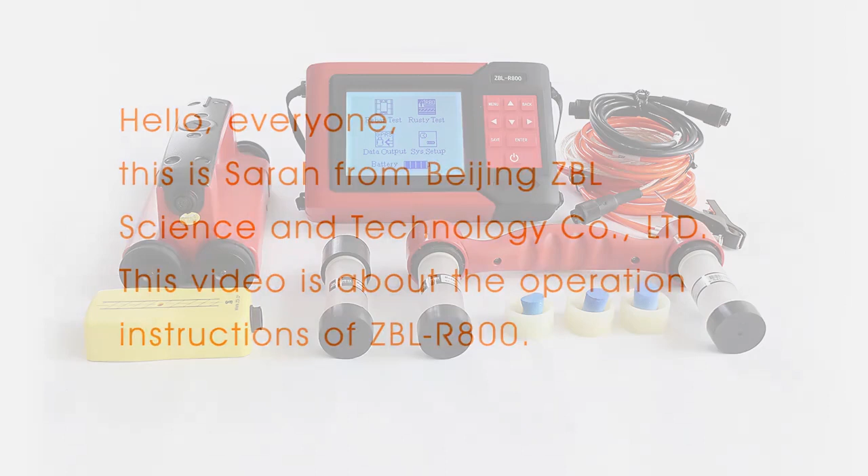This video is about the operation instruction of ZBL-R800. This multifunctional rebar detector is integrated and portable, which can estimate rebar diameter, test rebar cover meter, detect rebar location and distribution, and measure rebar's current condition.

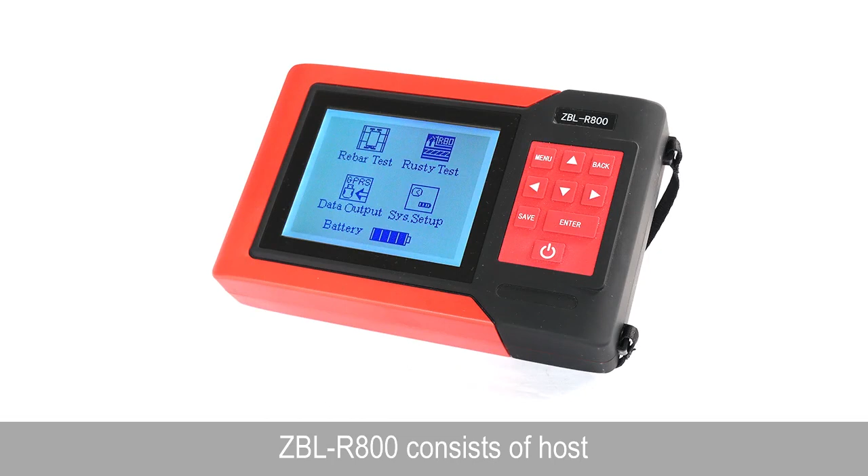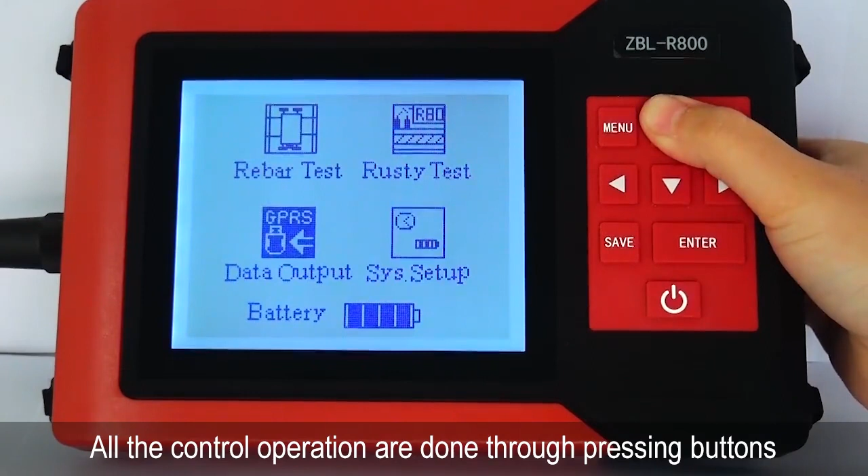Introduction of ZBL-R800. R800 consists of a host, rebar sensors, rebar signal wire, copper sulfate electrode, double electrode handle, rust signal wire, U-disc, charger, and so on. All the control operations are done through pressing buttons in the keyboard panel.

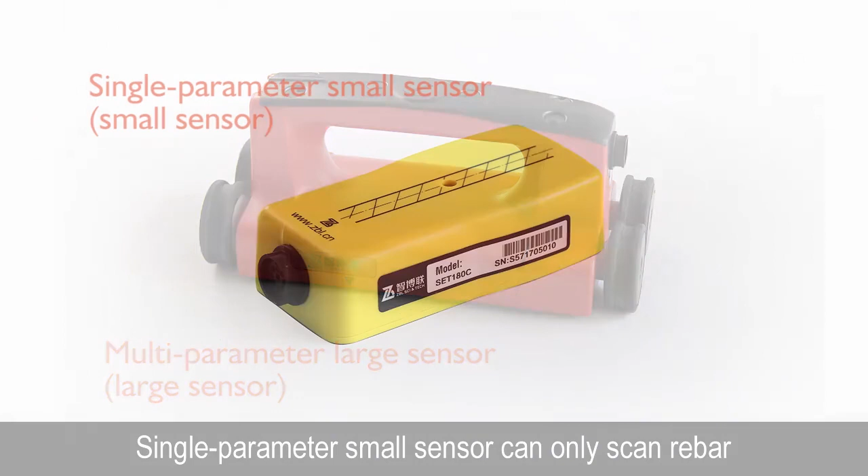On the left side of the host are round charging port, USB port, rebar sensor port, and rust electrode port. R800 detector has two sensors, large sensor and small sensor. Multi-parameter large sensor can scan rebar and record displacement of sensor in real time accurately. Single parameter small sensor can only scan rebar and it can't record the displacement of sensor.

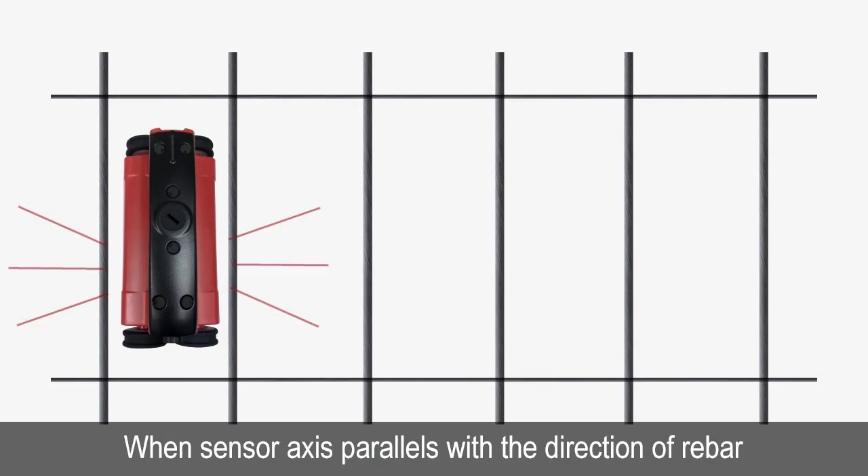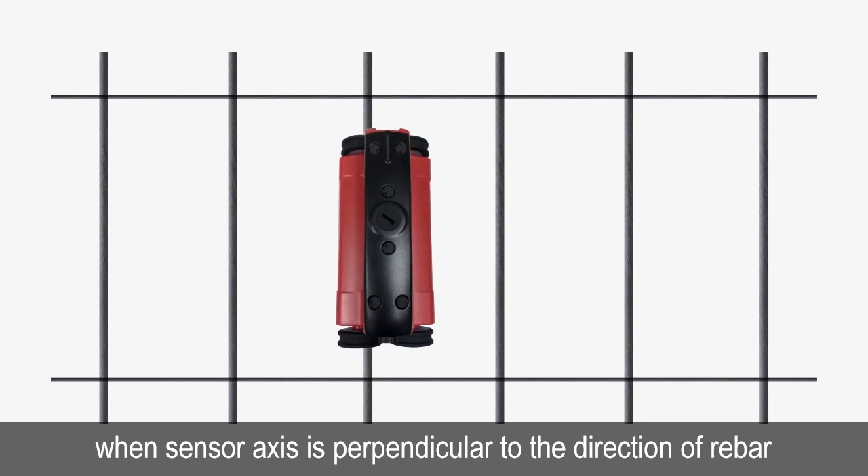When the sensor axis parallels with the direction of a rebar, it is the most sensitive. Conversely, when the sensor axis is perpendicular to the direction of a rebar, the signal is the weakest. Therefore, while measuring, sensor axis should be parallel with the direction of a rebar.

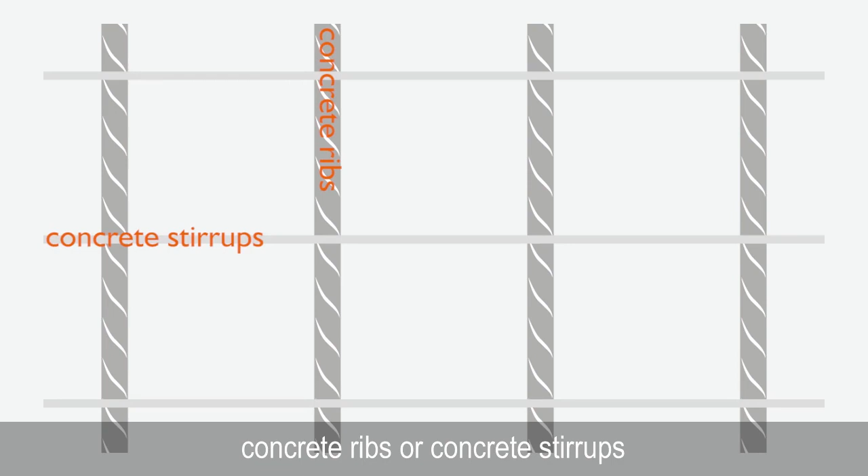Most importantly, when you detect cover meters, you should know clearly what rebar's cover meter you want to test, concrete ribs or concrete stirrups. When you test the rebar's cover meters, you should avoid the influence of stirrups, and likewise, you should avoid the influence of rebars if you need to test the cover meters of stirrups.

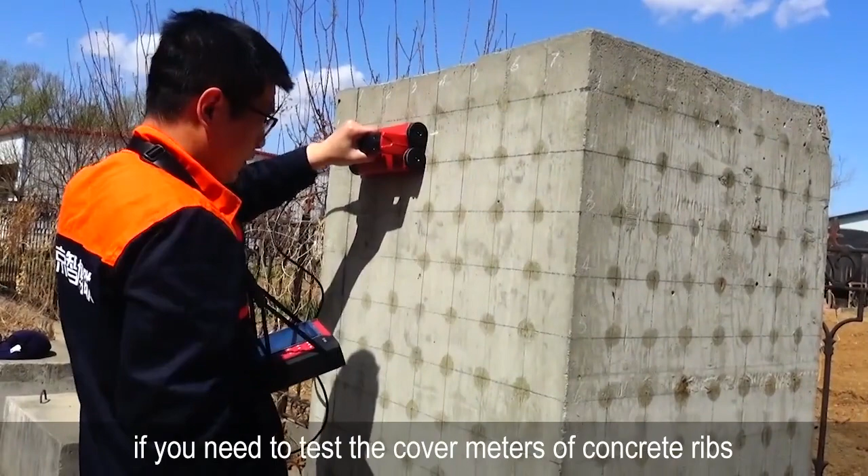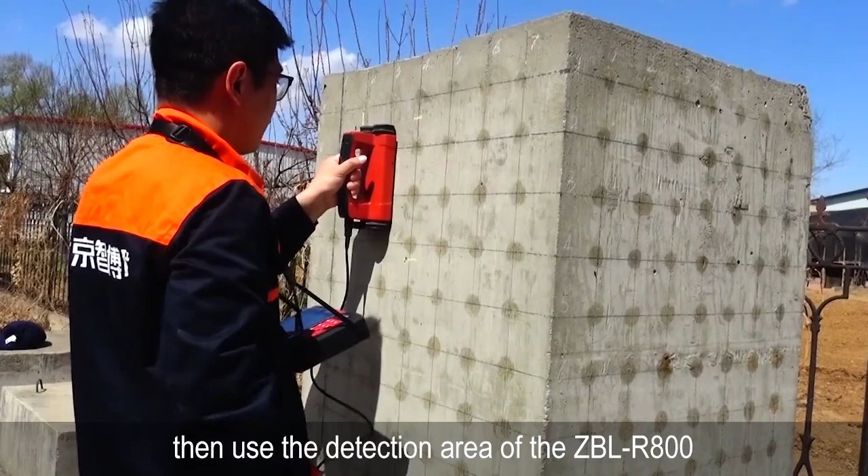For example, if you need to test the cover meter of concrete rebars, you should locate concrete stirrups and mark their position first. Then use the detection area of ZBL-R800 to scan the space between two stirrups to test the cover meter of concrete rebars.

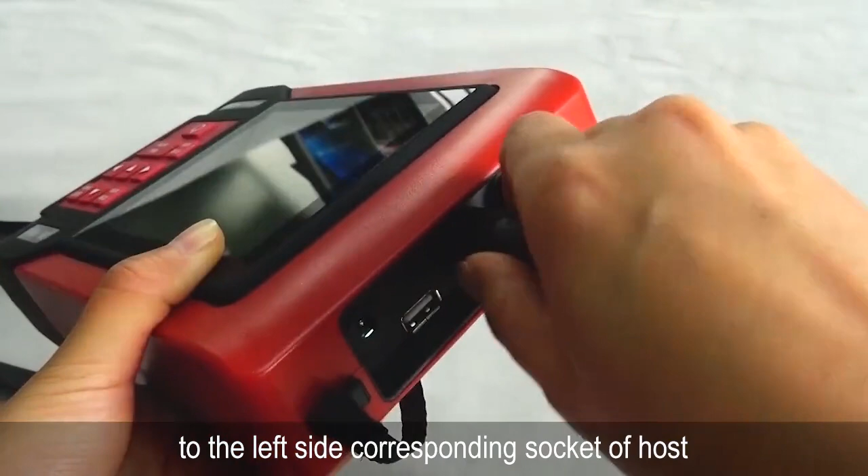When you test rebar corrosion on the double pole method, you should install these two copper sulfate electrodes filled with copper sulfate solution on double electrode handle. Insert one end of the black rebar signal wire to the left side corresponding socket of host, rotating clockwise and locking, and then insert the other end into sensor socket and lock in the same way.

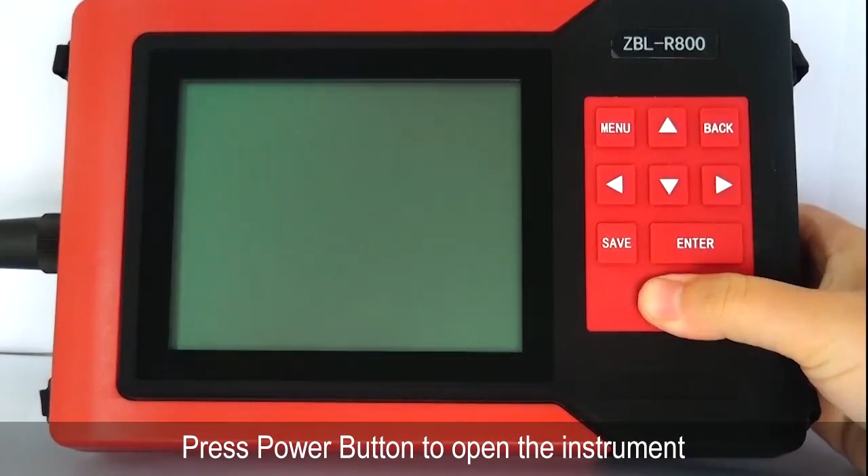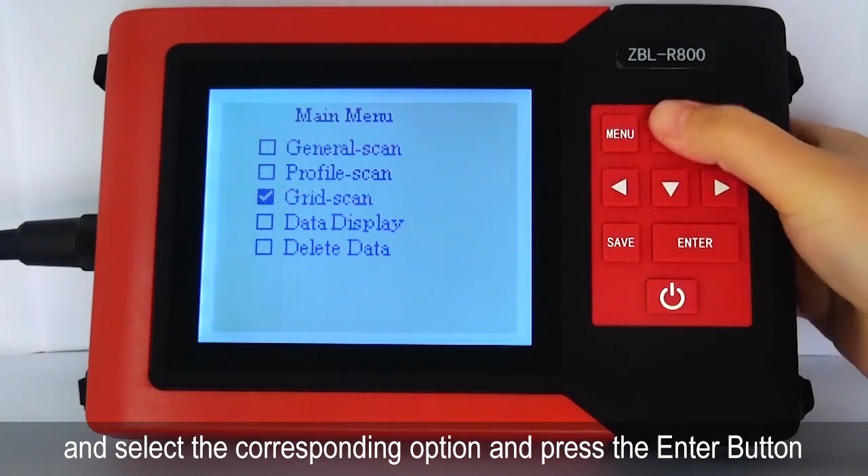Press power button to open the instrument, press right button to turn on screen backlight, press enter button to enter rebar tester interface. Rebar tester has three test modes: general scan, profile scan, and grid scan. Up button and down button can move the option box and select the corresponding option, and press the enter button to go to the corresponding sub-menu.

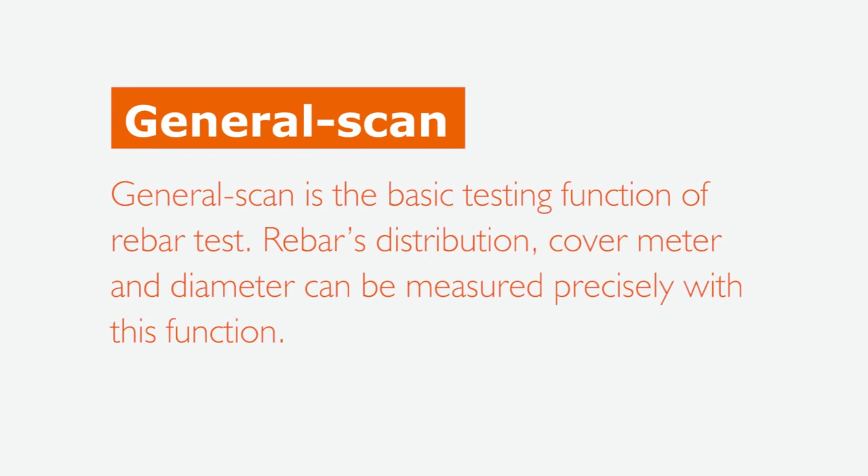General scan. General scan is the basic testing function of rebar test. Rebar's distribution, cover meter, and diameter can be measured precisely with this function. Press the enter button to general scan interface. Press enter button to set the object number.

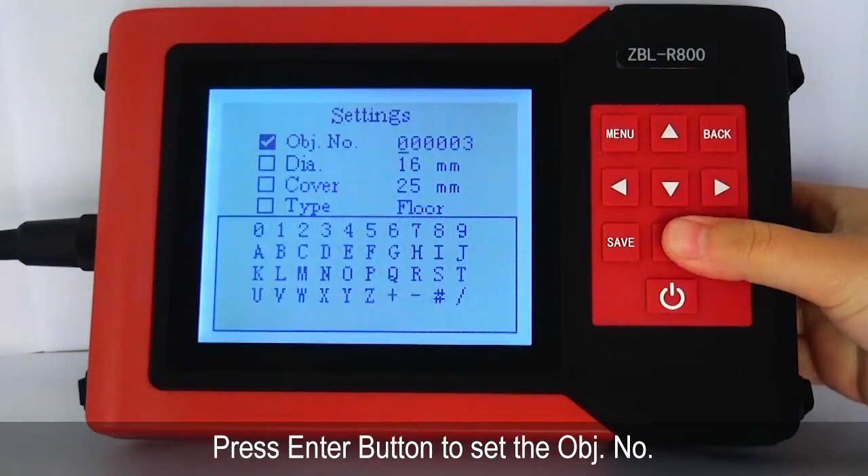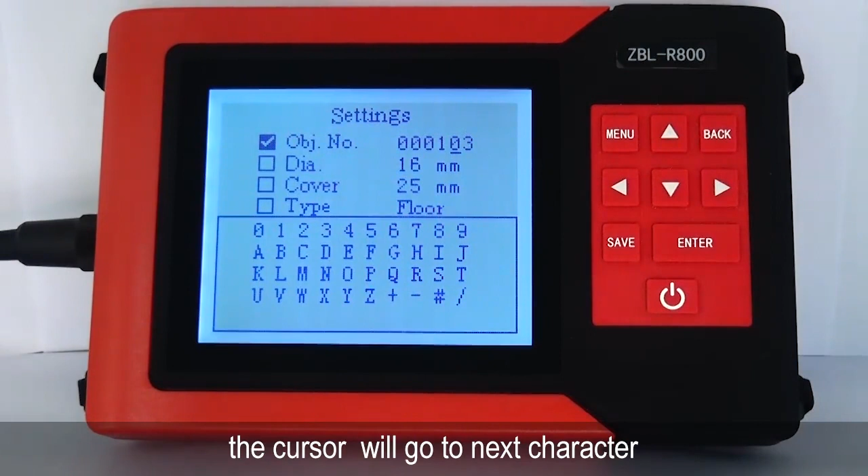Move the cursor to the character to be modified through pressing right and left button. Press enter button, the cursor will move to the keyboard. Find the character you want through pressing the direction buttons, and then press enter button. The cursor will go to next character. Press the save button after setting all characters.

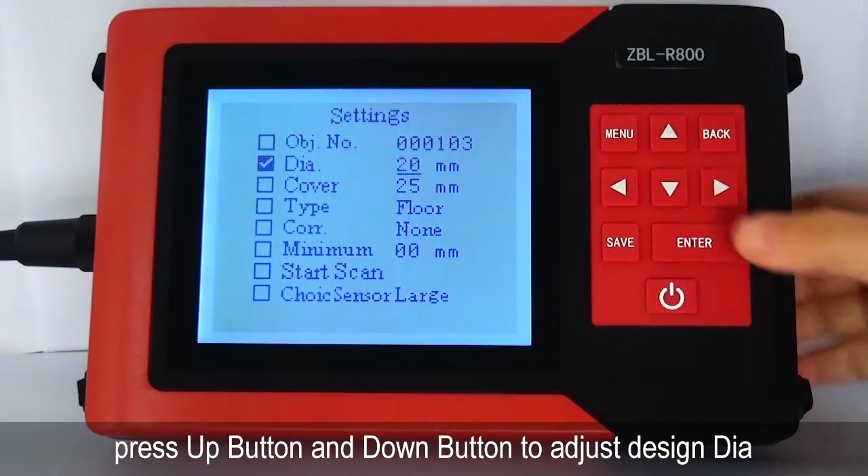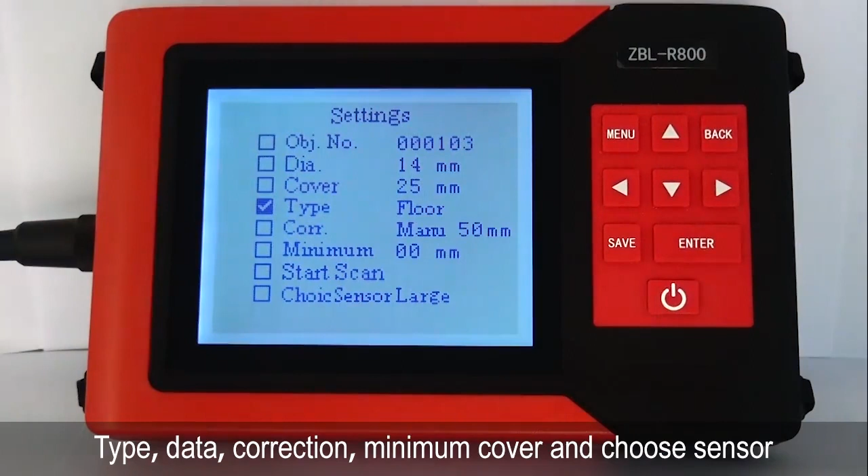Choose diameter through pressing down button, press enter button, press up button and down button to adjust the design diameter, and press enter button after completing adjustment. Revise design cover meter, diameter, type, data correction, minimum cover, and choose sensor based on real project information.

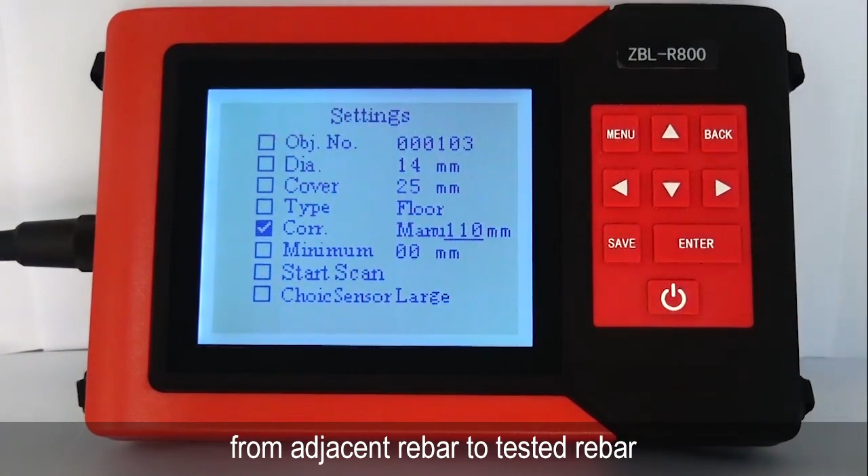Data correction. In order to lower the effects on the measurement of cover meter of tested rebar by adjacent abreast ones, it's better to set center distance from adjacent rebar to tested rebar, and then the detector can modify test result automatically and improve test accuracy.

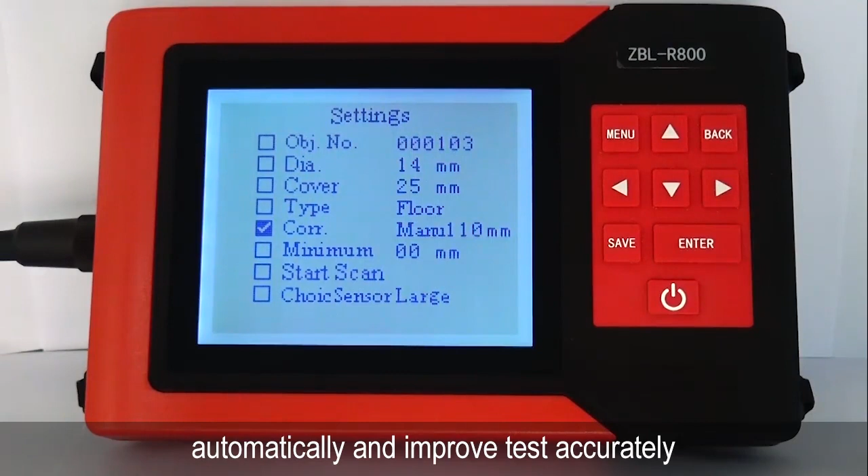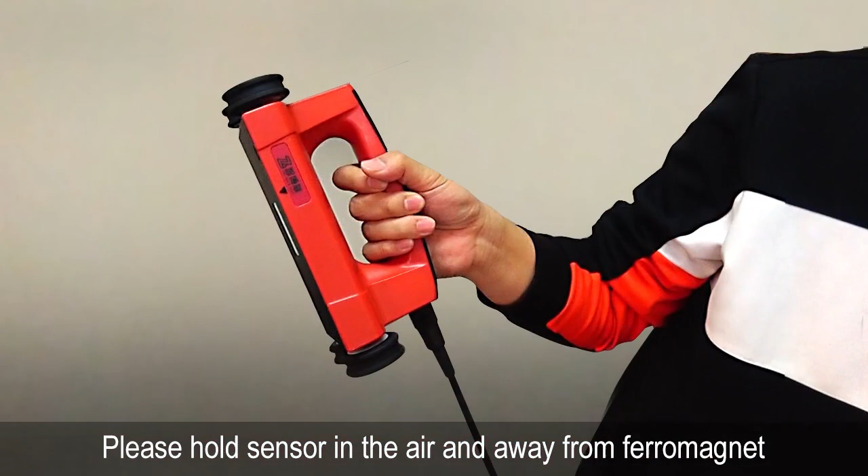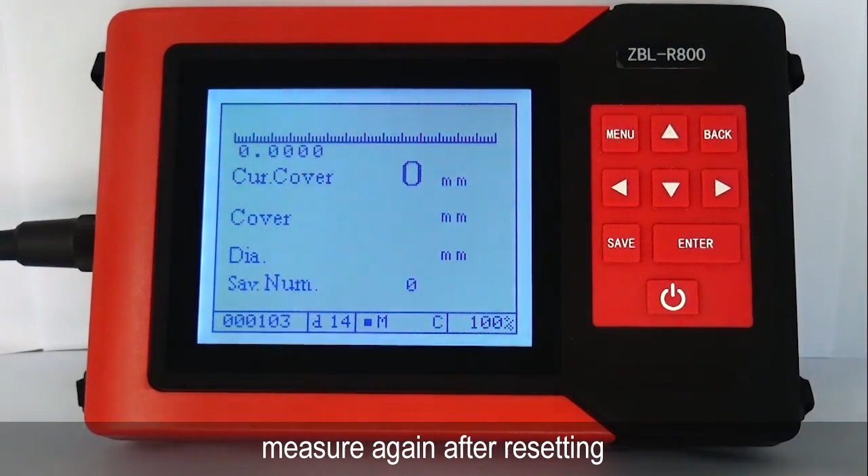After setting all parameters, choose Start Scan, press Enter button to go to Test Interface. Please hold the sensor in the air away from ferromagnet. After pressing Enter button, the instrument will reset automatically and the present thickness will show in blank. During detection process, a reset operation should be done about every 10 minutes. When in doubt about the measurement data, measure again after resetting.

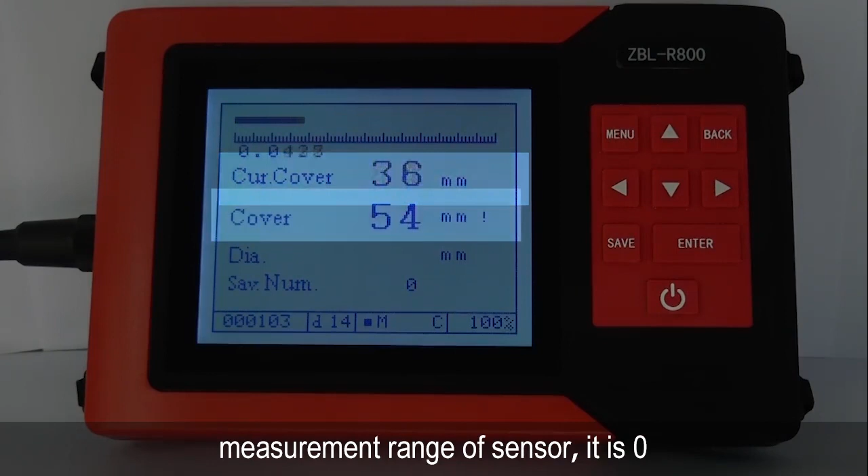Current cover. The current cover meter is the equivalent distance between sensor and rebar. The larger the equivalent value is, the further it is. When the equivalent value exceeds the measurement range of sensor, it is 0. Cover. Display of measurement value of thickness of concrete cover automatically.

If users use the data correction, it shows the corrected value. Diameter: display the diameter of tested rebar. Press the up button for the measurement of diameter when the sensor is just above the rebar, and the rebar diameter value will appear a moment later.

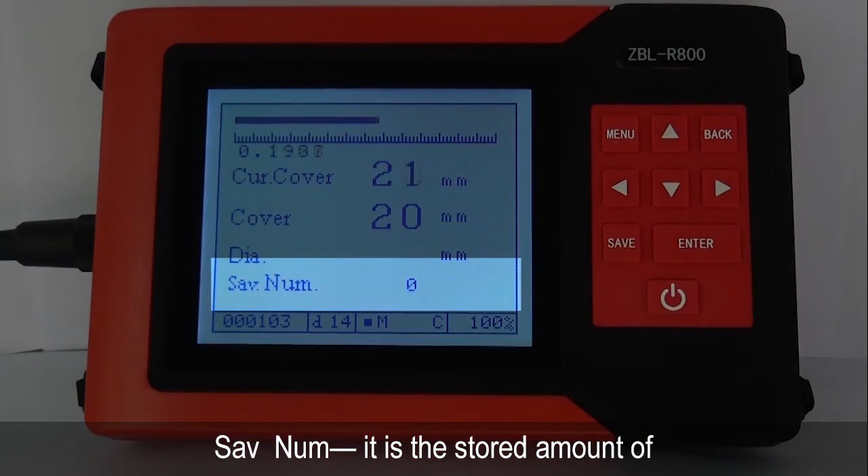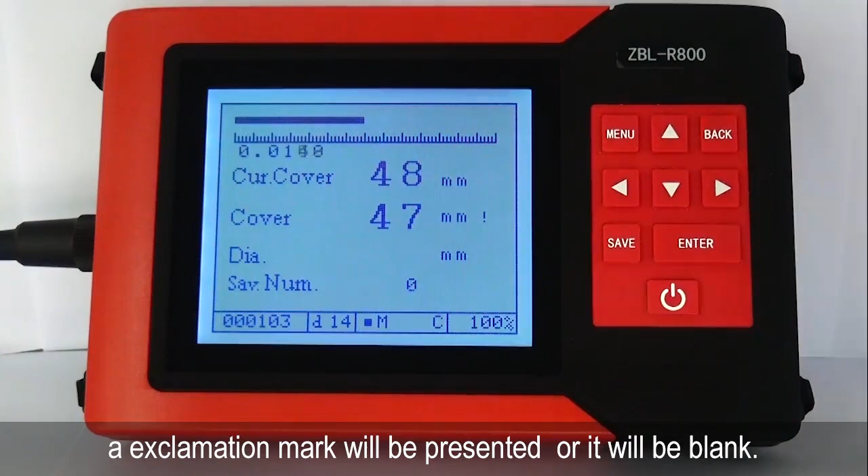Save number: it is the stored amount of cover meter for the present object. When the tested cover meter exceeds the range of specification, an exclamation mark will be presented, or it will be blank. The bottom line shows the object number, design diameter, status information, and qualification rate.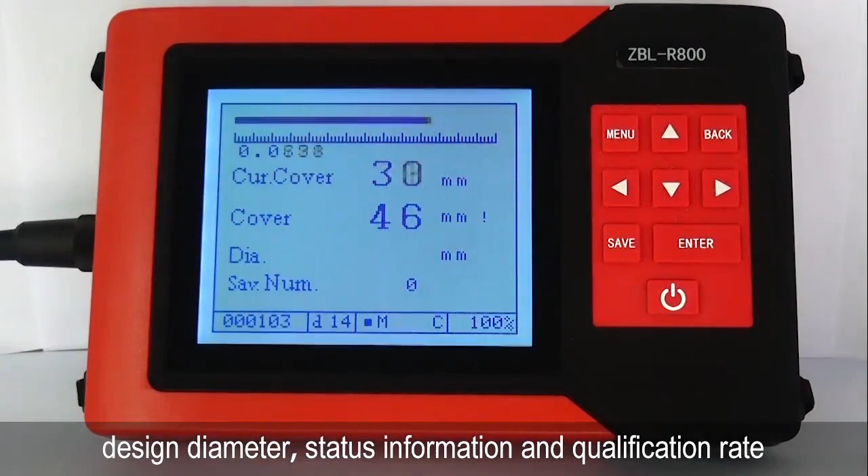A solid square in the information status bar represents small range, and an open square represents large range. Large range is suitable for large cover meter situations. The default range is small range, and you can change range by pressing the right button. M represents manual storage, while A represents automatic storage. You can adjust by pressing the left button.

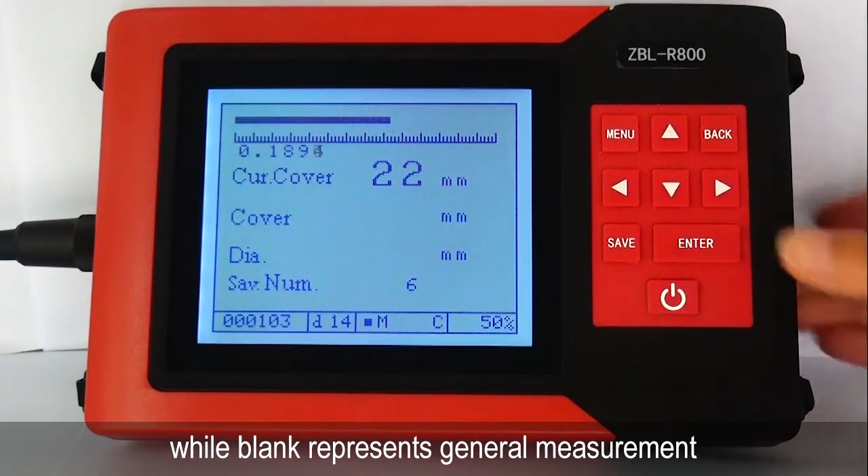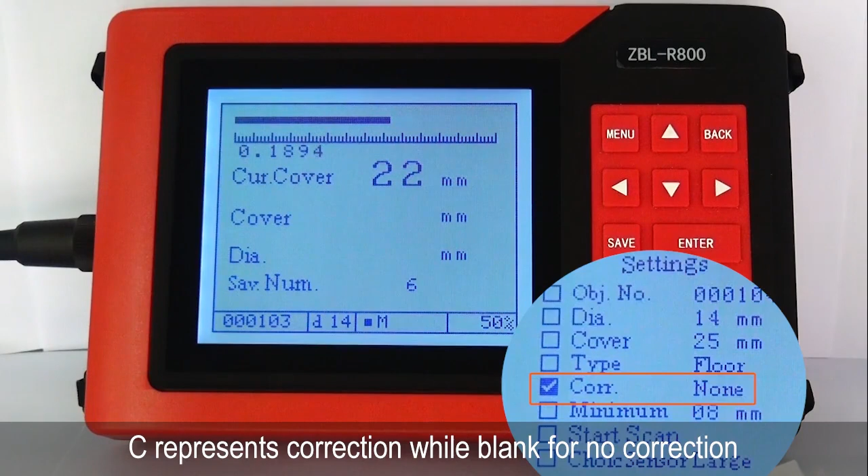This icon represents denser rebar measurement, while blank represents general measurement. The default one is general measurement, and you can switch by pressing the down button. C represents correction, while blank is for no correction.

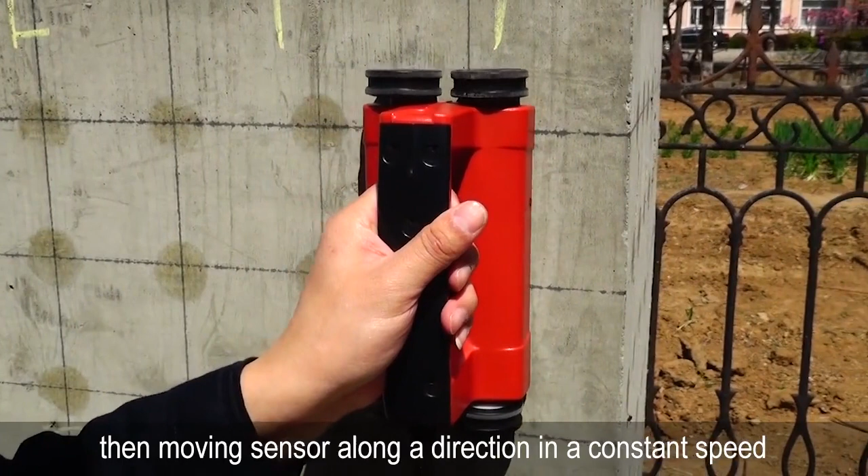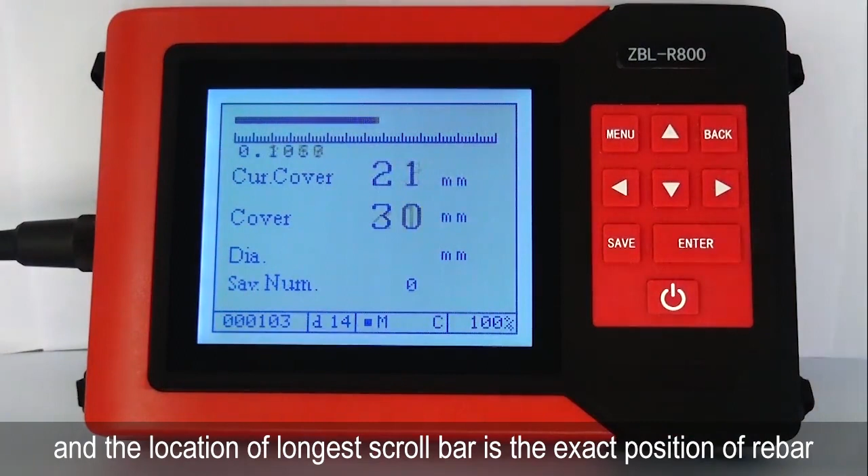Place the sensor on the surface of the tested concrete, parallel with the tested rebar, then move the sensor along a direction at a constant speed. When the sensor goes towards the rebar, the signal value will become larger and larger, and the biggest signal value identifies the location of a rebar. When the sensor approaches the rebar, the scroll bar will lengthen gradually, and the location of the longest scroll bar is the exact position of the rebar. When the sensor goes over the rebar, the buzzer will alarm.

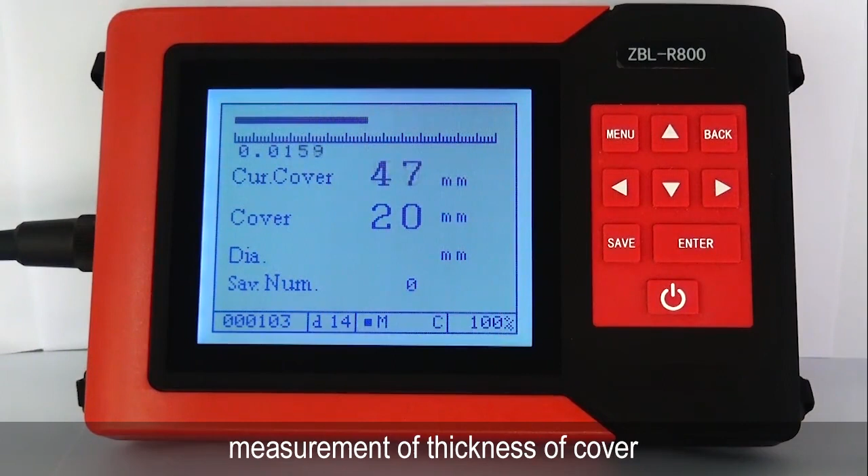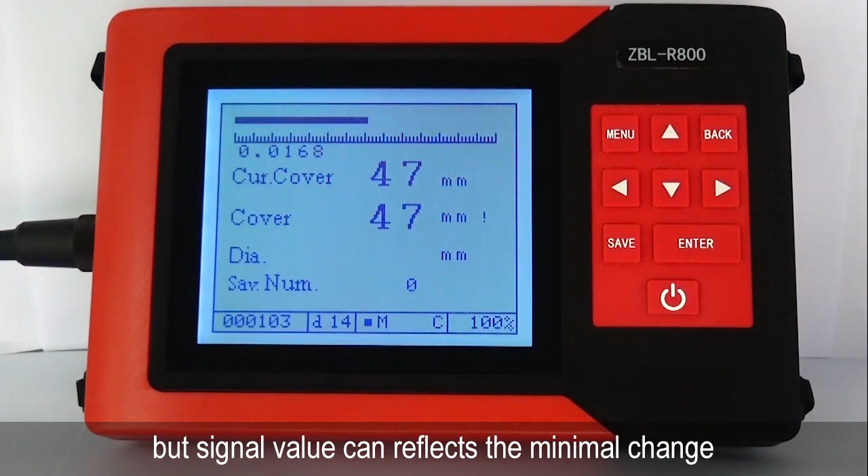Signal value is the fundamental basis of measurement of the thickness of cover. When the change of cover meter is within 1 mm, the current cover value will not change, but the signal value can reflect the minimal change. Therefore, according to it, you can locate the exact position of rebar more accurately. When the sensor approaches the rebar, the current cover value will gradually become smaller, or else the current cover value becomes larger. The location of minimum cover is the exact location of the rebar.

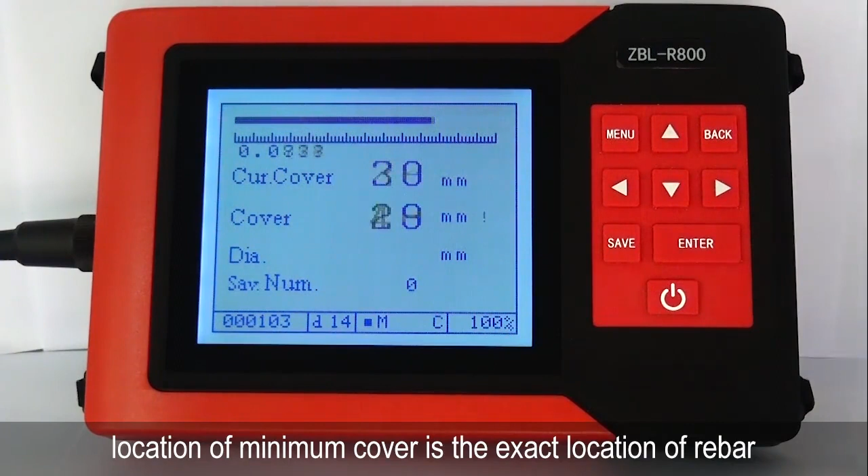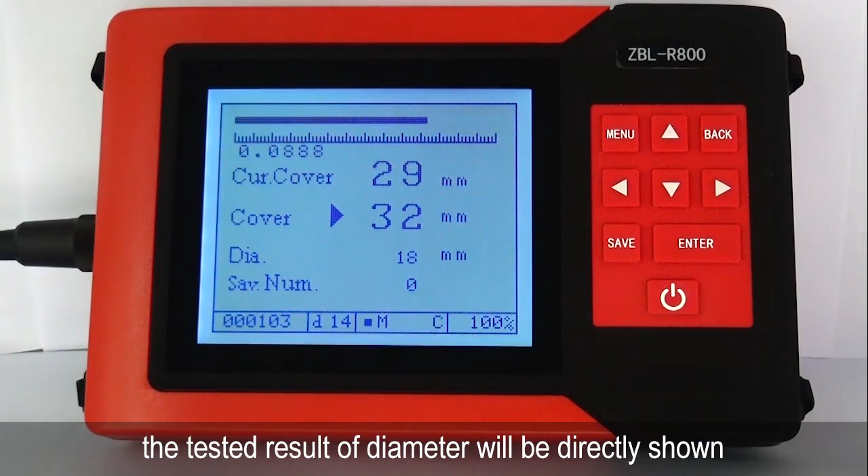Placing the sensor above the tested rebar and parallel with it, press the up button. After about 2 seconds, the tested result of diameter will be directly shown in the position of diameter. Under the mode of manual storage, if you press the Save button, it will store diameter and thickness of cover, and the storage amount increases by 1. Under the mode of automatic storage, it will store the diameter value and thickness of cover automatically.

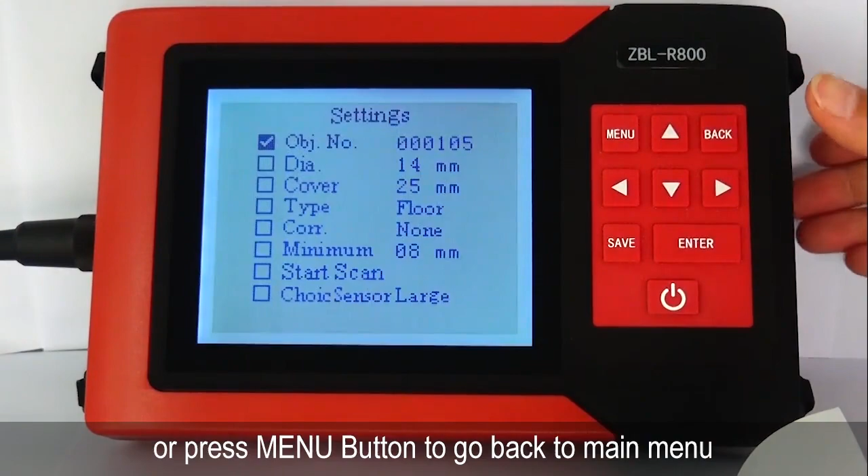After the test is completed, press the Back button to go back to the parameter setting interface, or press the Menu button to go back to the main menu.

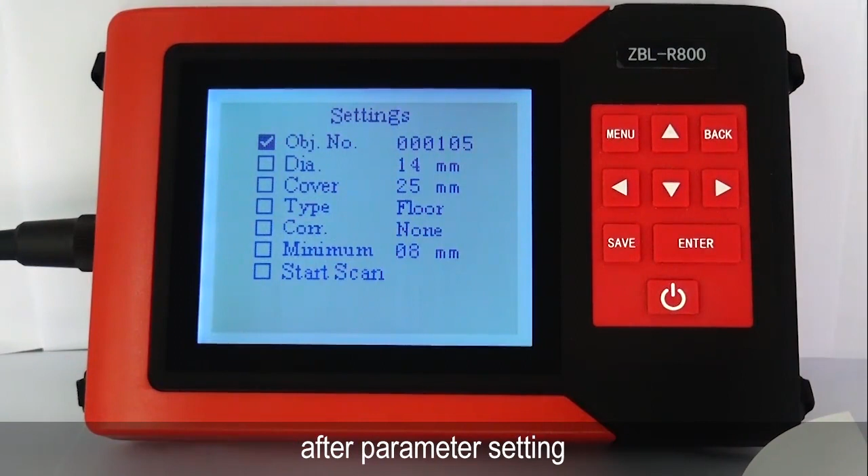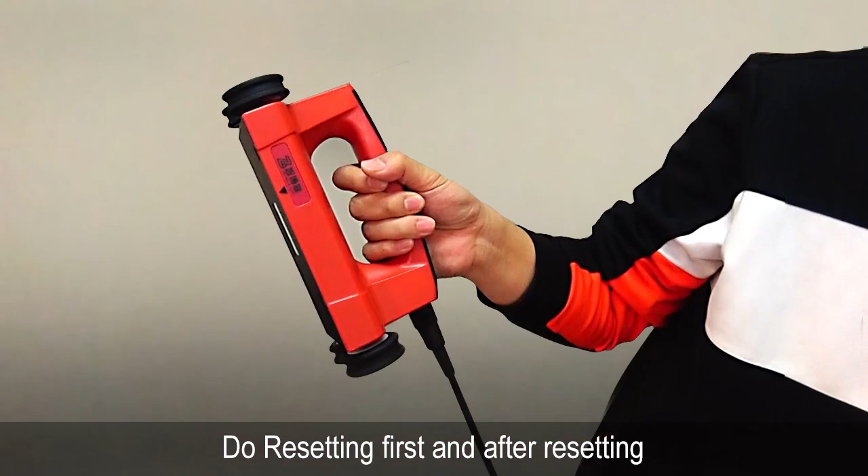Profile scan. Profile scan is a test displaying the location of tested rebar and thickness of cover with a sectional distribution map. Choose Profile Scan and enter the Parameters Setting Interface. Under this test mode, it is a must to choose the Large Sensor to scan. After parameter setting, please select Start Scan and press the Enter button to store parameters and enter into the Test Interface. Do resetting first, and after resetting, press the Save button to enter into the Test Interface.

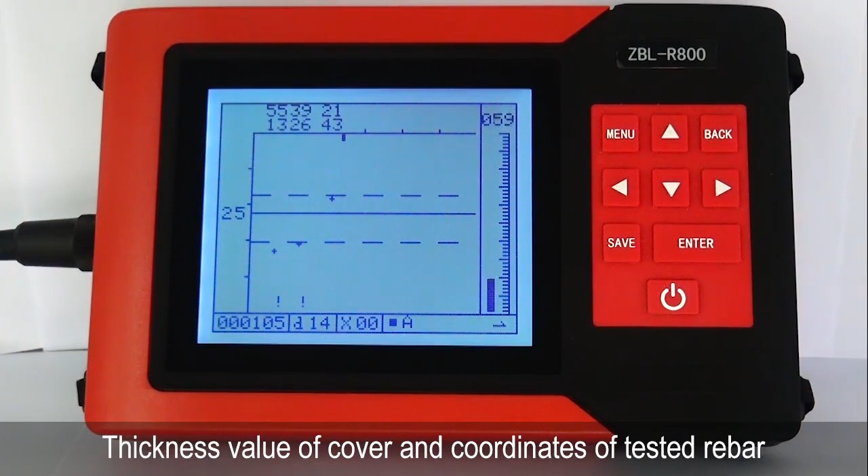A square cursor will occur in the top left corner, indicating the location of the sensor. While testing, move the sensor at a constant speed. When the sensor goes over a bar, the buzzer will alarm. The tested rebar will be displayed in a corresponding coordinate, indicated by a black cross. The thickness value of cover and the coordinates of the tested rebar will be displayed on the upper side of the rebar, and the tested result will be stored simultaneously.

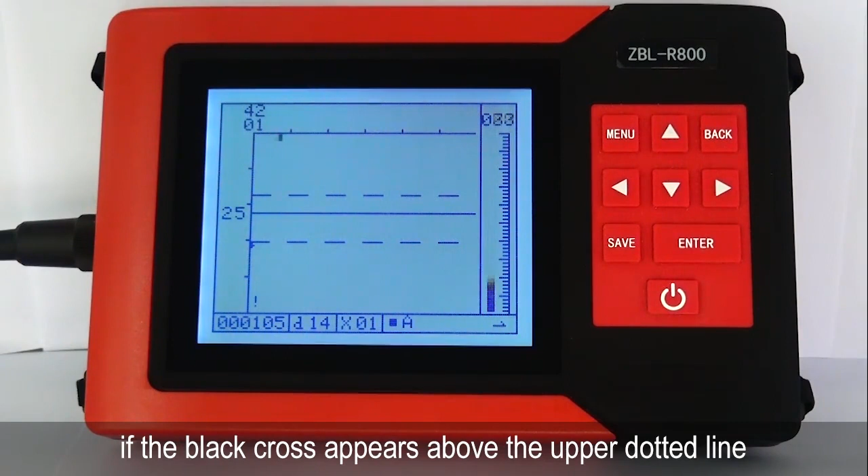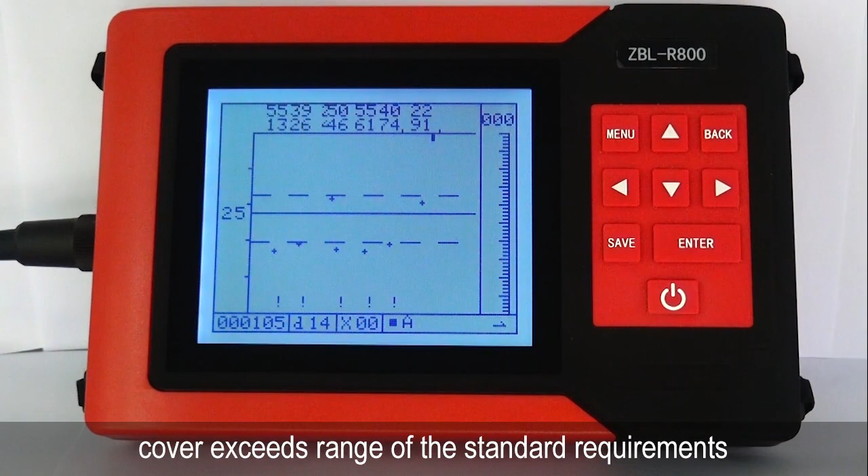The horizontal solid line in the central position is the design thickness value. The upper and lower dotted lines are the minimum and maximum thickness of cover. If the black cross appears under the lower dotted line, it means the rebar's cover is rather thick, and if the black cross appears above the upper dotted line, it means the rebar's cover is pretty thin. During the test process, when the tested thickness of cover exceeds the range of the standard requirements based on design thickness, an exclamation mark symbol will occur, or it will be blank.

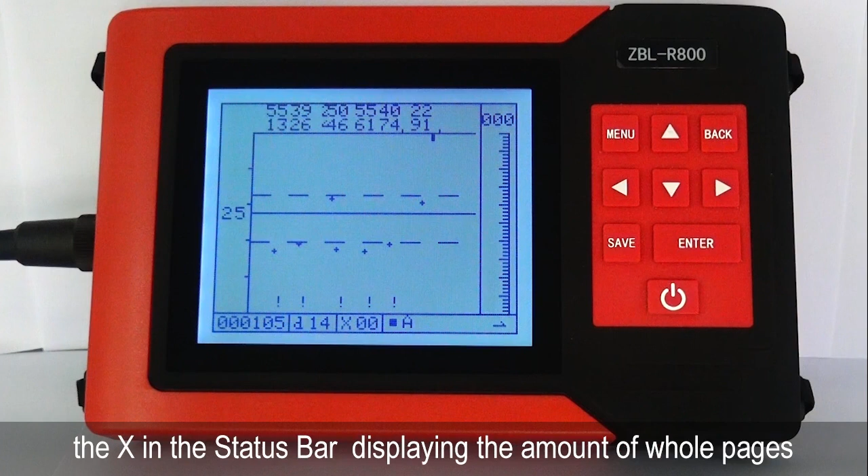When the moving distance is more than 1.2 meters and goes over the range of each screen, it will turn pages automatically. The X in the status bar displaying the amount of whole pages will increase by 1.

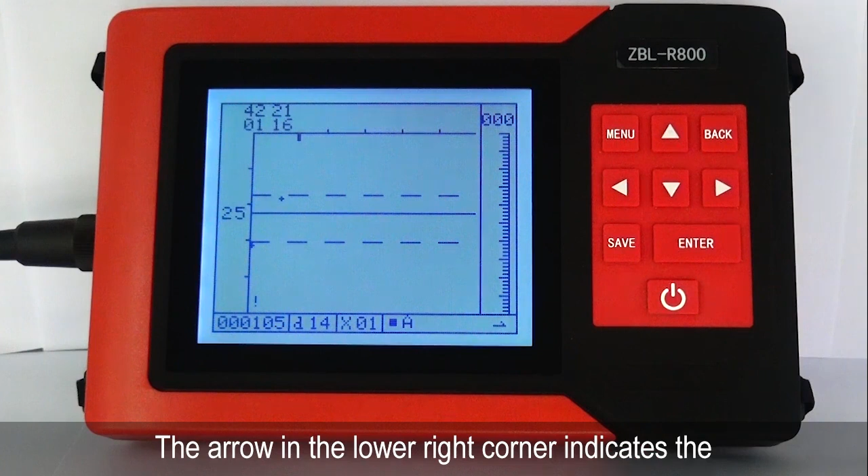The arrow in the lower right corner indicates the direction the sensor is moving. After the test is completed, press Save button, press Back button to store testing data and go back to parameter setting interface, or press Menu button to go back to Main menu.

Grid Scan. Grid Scan mainly displays the distribution of grid distributed rebar through grid diagram and displays the location of rebar and the thickness of cover at the same time. Enter Parameter Settings interface. Diameter X, the diameter of awaiting measuring rebar in X direction. Cover X, the thickness of cover of awaiting measuring rebar in X direction.

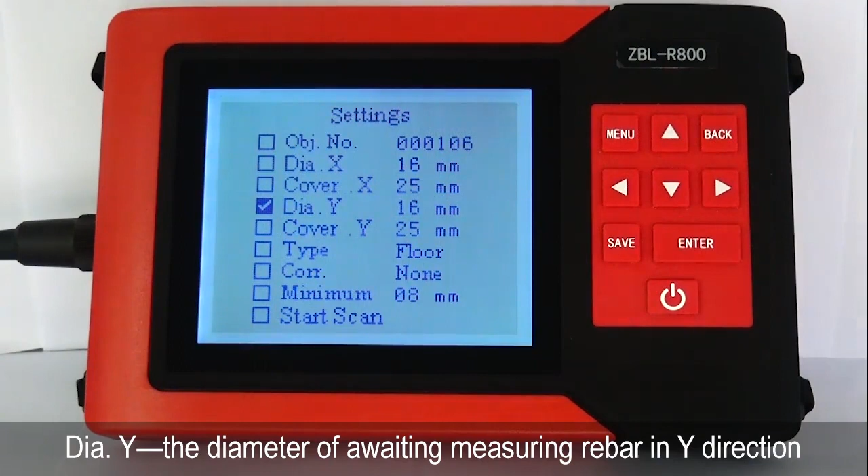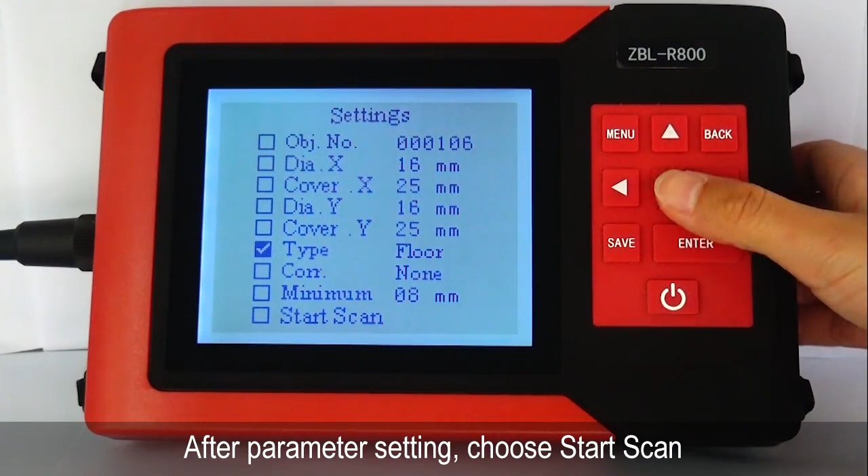Diameter Y, the diameter of awaiting measuring rebar in Y direction. Cover Y, the thickness of cover of awaiting measuring rebar in Y direction. After parameter setting, choose Start Scan and press Enter button to go to Test interface. Do resetting first. After resetting, press the Save button.

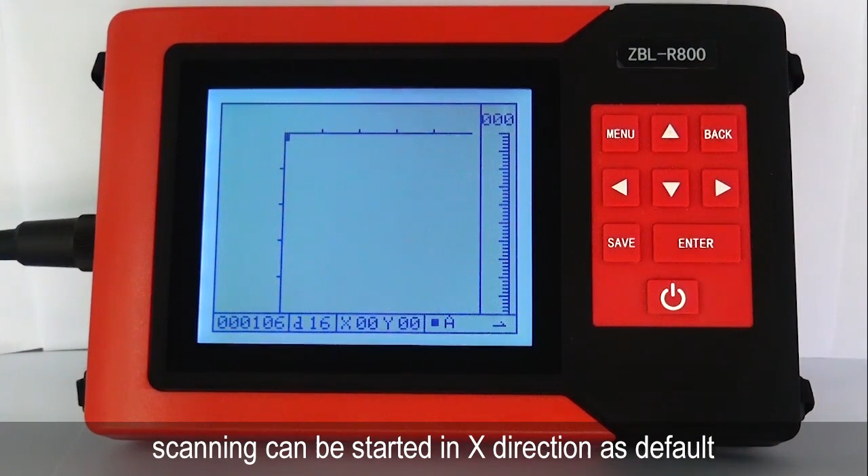A square cursor occurs in the upper left corner, showing the present displacement of a sensor. Scanning can be started in X direction as default. Move the sensor at a constant speed. When the sensor goes over rebar, the buzzer will alarm. The tested rebar will be displayed in coordinate.

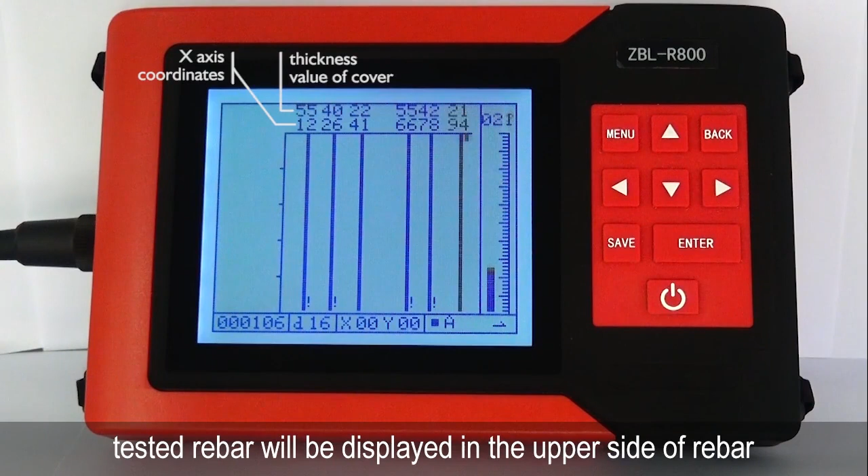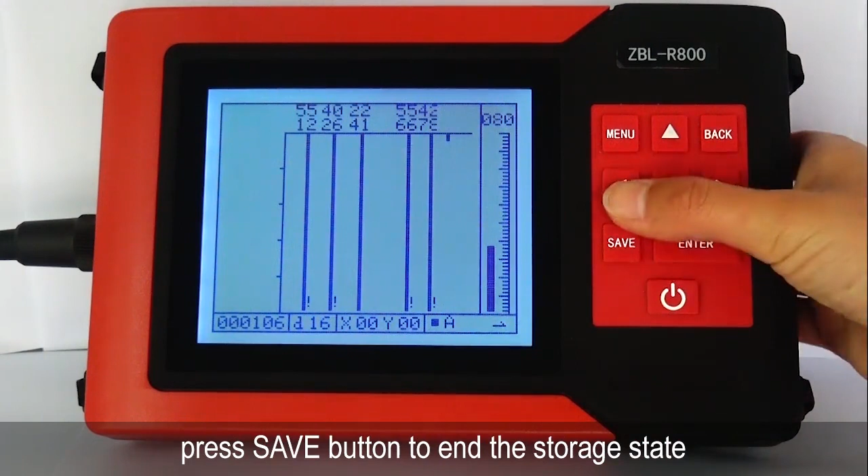Thickness value of cover and X-axis coordinates of tested rebar will be displayed on the upper side of rebar, and the tested result will be stored simultaneously. When X direction test is completed, press the Save button to end the storage state. Press Up button to shift to another direction.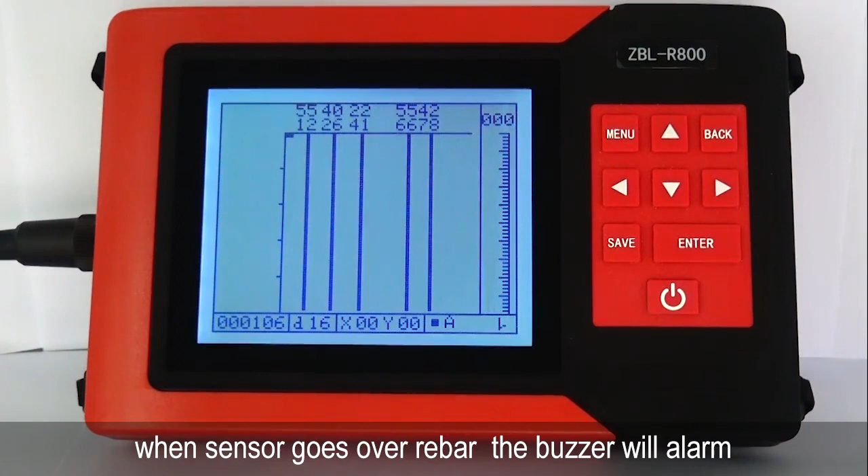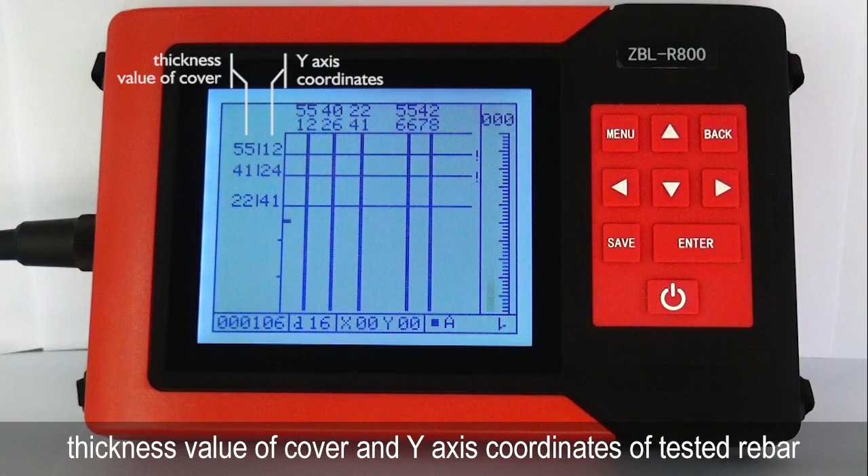The default diameter and direction marker in Y direction will be shown in status bar. Press the Save button for scanning, moving the sensor constantly. When the sensor goes over rebar, the buzzer will alarm. The tested rebar will be displayed in coordinate, and the thickness value of cover and the Y-axis coordinates of tested rebar will be displayed on the left side of rebar.

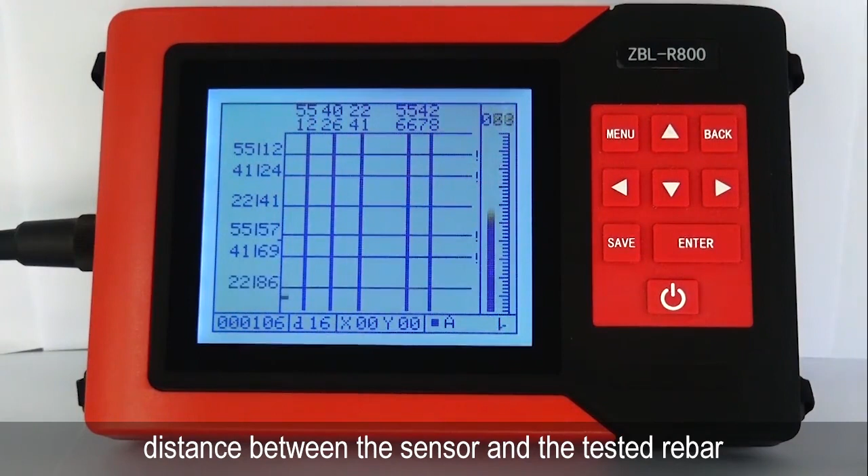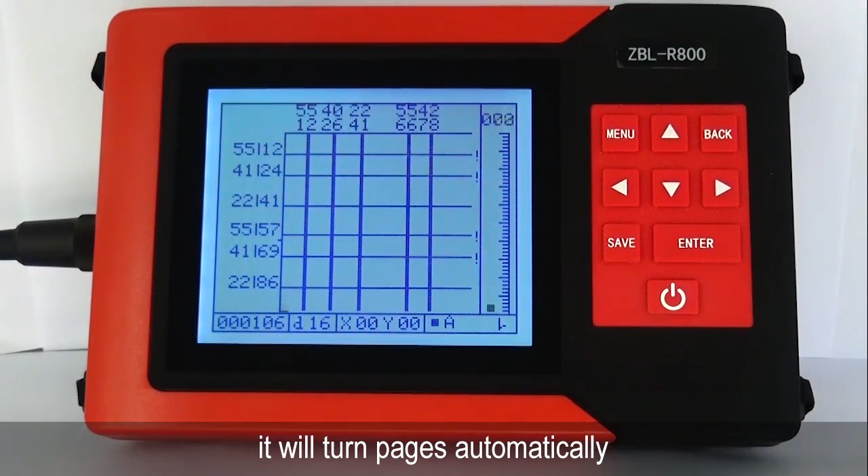When the scanning distance goes over the range of each screen, it will turn pages automatically. The increase by 1 in X and Y direction shows a page turned. After completing test, press the Save button and exit test interface.

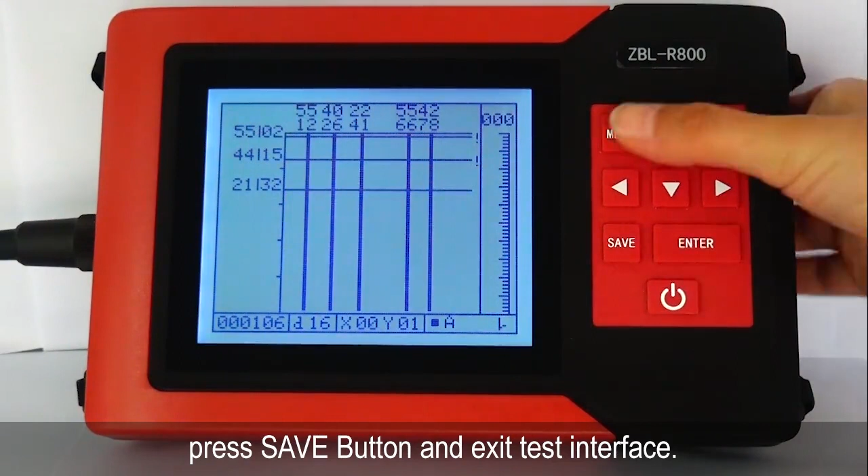After testing, you can check the data or image through entering Data Display. You can delete data through choosing Delete Data. But make sure the data to be deleted have been transferred to your computer, as this operation is irreversible.

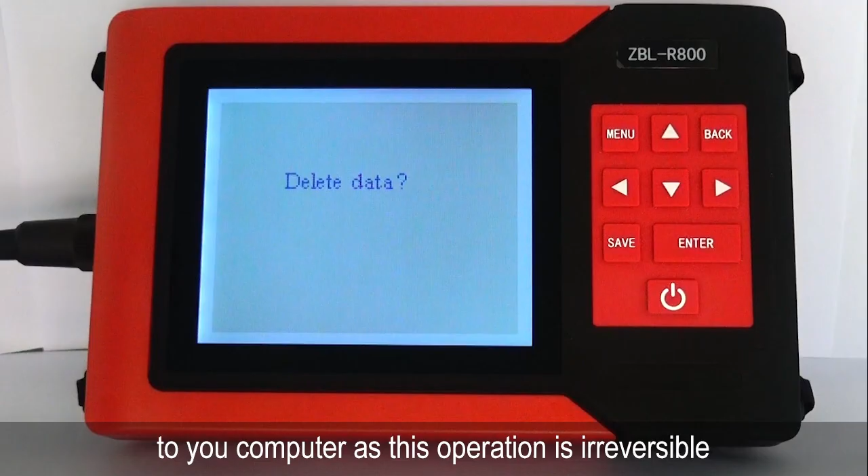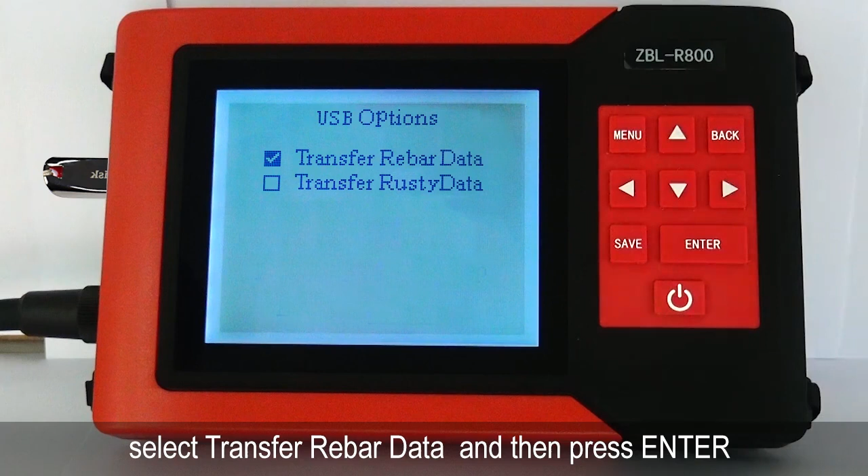Data analysis. Data transmission. Plug the U-disc attached with the instrument into the USB port, select data output, and then press Enter button to enter USB options interface. Select Transfer Rebar Data and then press Enter button. The instrument will start up U-disc power supply automatically. Then, running OK indicates a successful transmission.

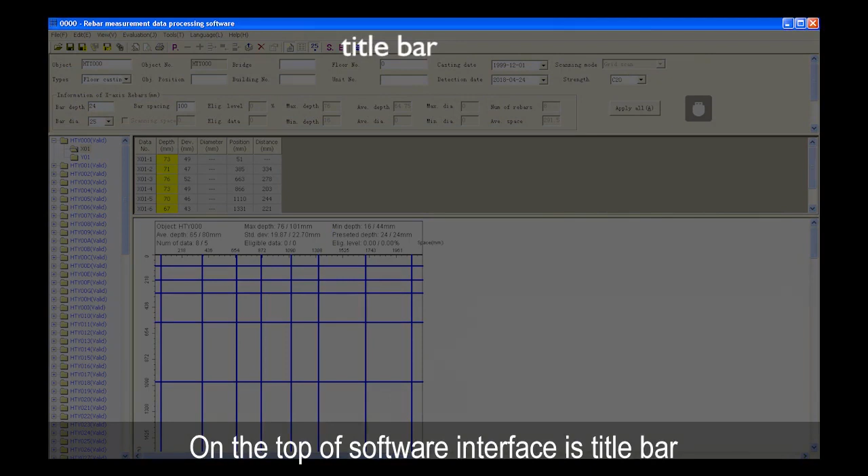Data analysis. Copy the testing data to the computer and double-click Rebar measurement data processing software on the desktop of computer. Click the File button on the menu bar and open the data file you want to analyze. On the top of the software interface is the title bar, followed by menu bar, toolbar, object information area.

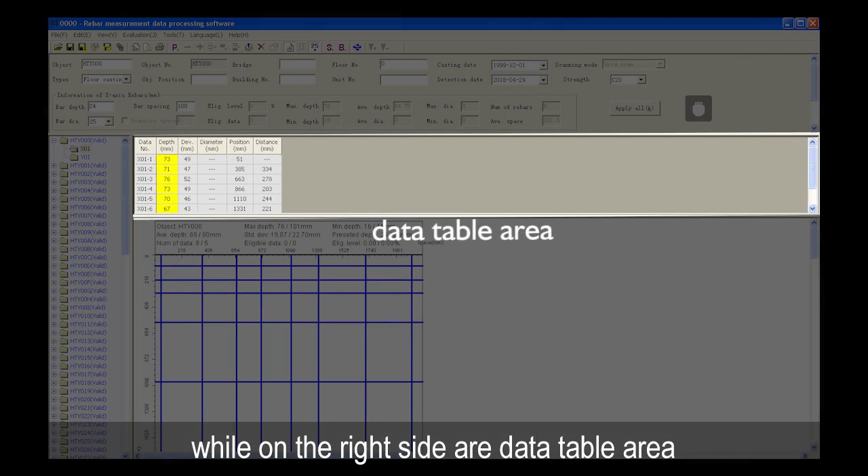The object list is on the left side of the software interface, which shows all objects in the project, while on the right side are data table area and data diagram area. The data table area is used to display the original testing data of each measurement point of the current object, and this icon indicates no data.

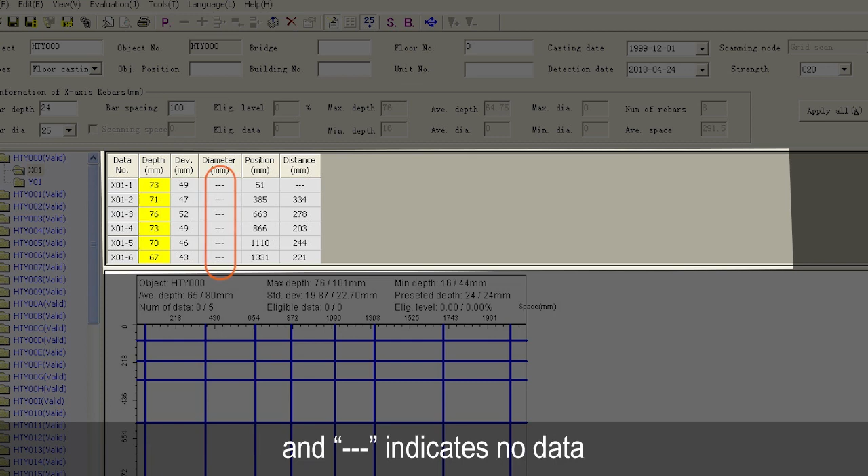The data with yellow shading is the data higher than the allowed deviation range, and the data with red shading is the data lower than the allowed deviation range. The data diagram shows the testing lines or profile diagram of the current tested object.

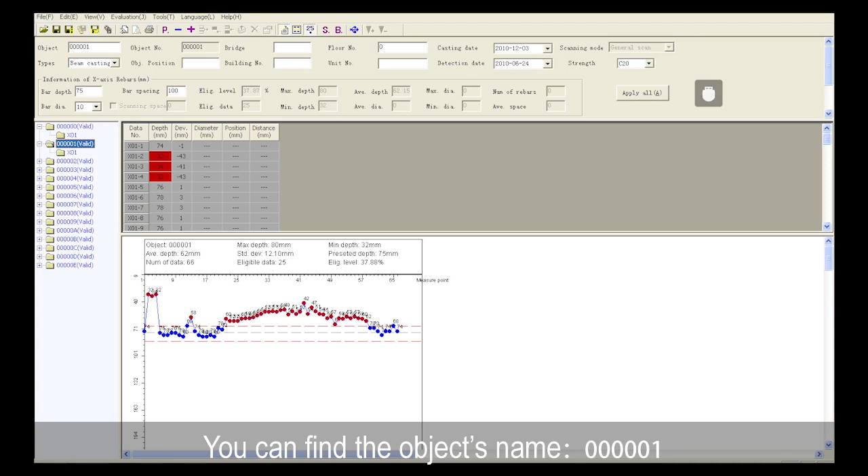Take this object as an example, whose scanning mode is general scan, and you can improve object information on object information area. You can find this object's name is 000001, design cover and design diameter are 75 mm and 10 mm respectively.

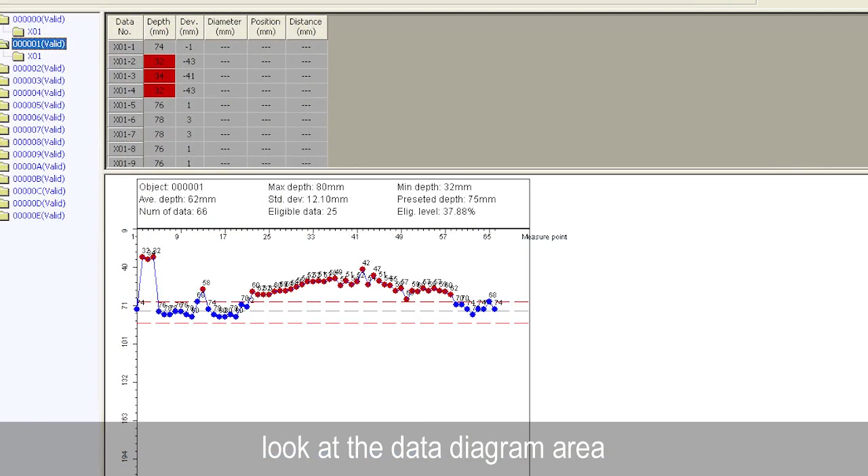Look at this data diagram area. Blue measurement points mean the corresponding testing data is qualified, while red measurement points mean the corresponding testing data is unqualified.